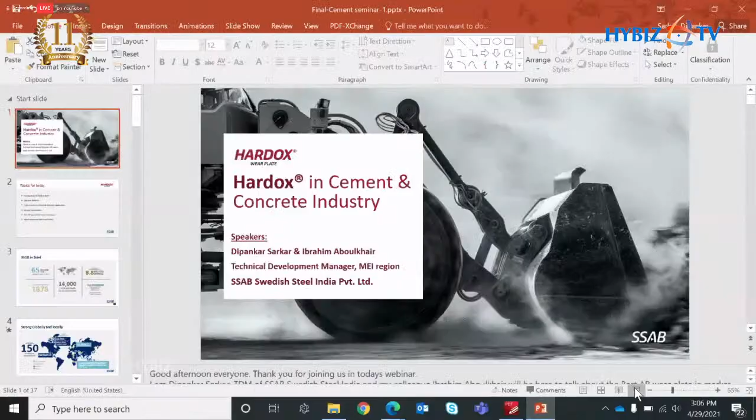Good afternoon, everyone. I hope you are seeing my screen right now. My name is Dipankar Sarkar, Technical Development Manager for SSAB Steel India Private Limited. I'm taking care of India operations, and with me is my colleague from Germany, Mr. Ibrahim Aboulkhair, who is looking after the Middle East regions. Today we'll be talking about the various applications of Hardox wear plates in the cement and concrete industries and how they benefit customers.

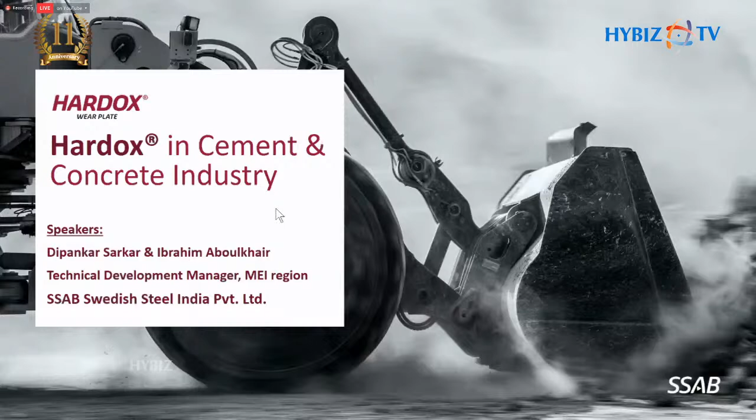So topics for today: we have introduction of our SSAB company, what is its background in brief, and upgrade benefits to the customer, how we are benefiting the environment, and also the type of wear happening in cement and concrete applications. Then Hardox introductions - we'll talk about the Hardox product portfolio and what we are capable of producing in wear plates. After that, we'll show you the overall application areas where our Hardox wear plate is currently being supplied, and how we are upgrading the wear plates in various applications. Then we'll go into direct applications, live case studies, and parts.

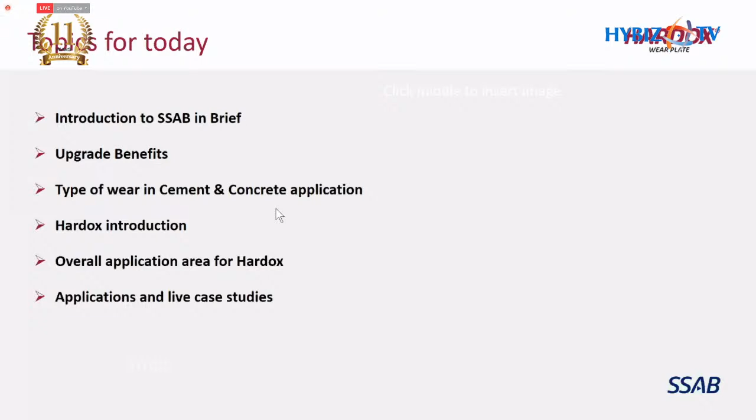Just stay tuned. So, SSAB in brief - SSAB Swedish Steel has been present in the global steel market since 1878, that is more than 140 years old. We have production capacity of 8.8 million tons annually, and currently we have 14,000 professionals supporting our customers in 50 countries. Despite having a pandemic year, we managed to score annual net sales of 65 billion Swedish krona. We have mainly three steel divisions: SSAB Special Steels, SSAB Europe, and SSAB Americas, and two subsidiaries in Finland, Tibnor and Ruukki Construction.

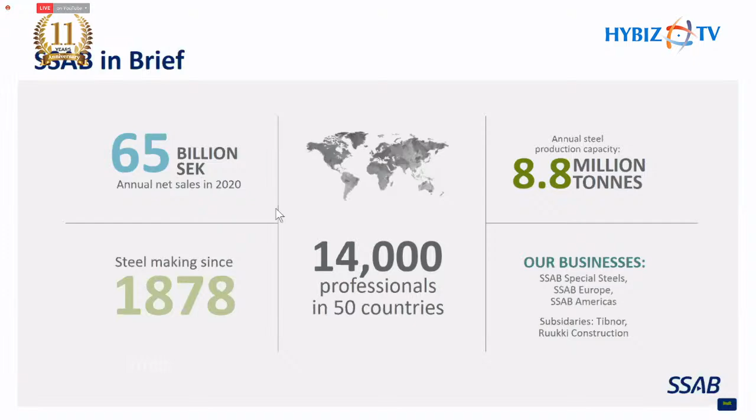So how we are present globally and locally - as you can see on the global world map, we cover more than 150 countries with our sales and tech support. We have 5 production plants in Nordic countries and 2 production plants in USA, in Iowa and Alabama. We have 3 production units in Sweden and 2 production units in Finland, along with a tube and section manufacturing unit in Finland. In India, we have 4 regional sales managers looking after commercial parts and sales support, and 2 technical development managers, including myself. There are 2 warehouses in Chennai and Mumbai, with total capacity of 7,500 tons.

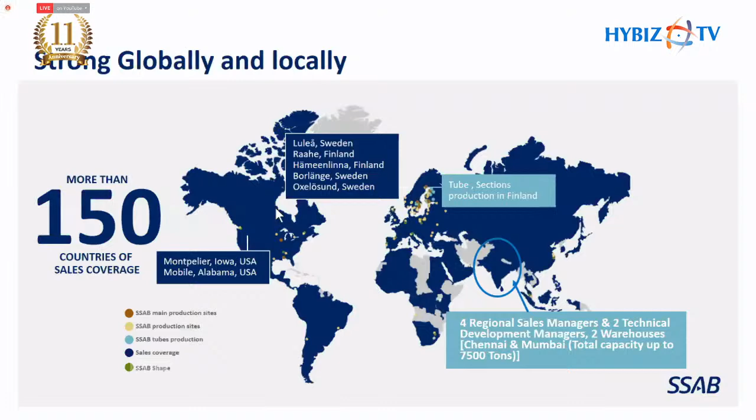So how are we upgrading? The upgradation, in order to upgrade the abrasion resistant steel - we have a vision in SSAB, that is to make a stronger, lighter, and more sustainable world. And in order to realize that vision, we are providing high hardness and high strength products to increase the service life.

Also, it will increase the strength of the product with the capacity to reduce the weight, which will result in lowering the production cost. And when you reduce the weight, it leads to less fuel consumption and less CO2 emission to the environment. So we are not only benefiting the customer, we are also benefiting the environment.

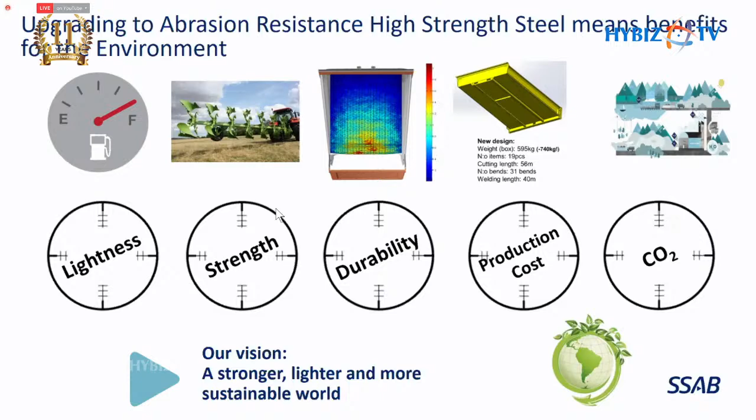So there are different types of wear which we are currently facing in challenging environments like cement and concrete industries. We mainly have three types of wear which we can see in the photographs: sliding wear, impact wear, and erosion wear, which we can also see in the cement and concrete industries.

In sliding wear, as you can see, abrasive particles slide down the wear plates and micro cut the wear plate surfaces, causing them to worn out.

In impact wear, the abrasive particles fall at a particular angle and velocity on the liner plates, as you can see, and the wear plate will be subjected to impacts because of these abrasive particles.

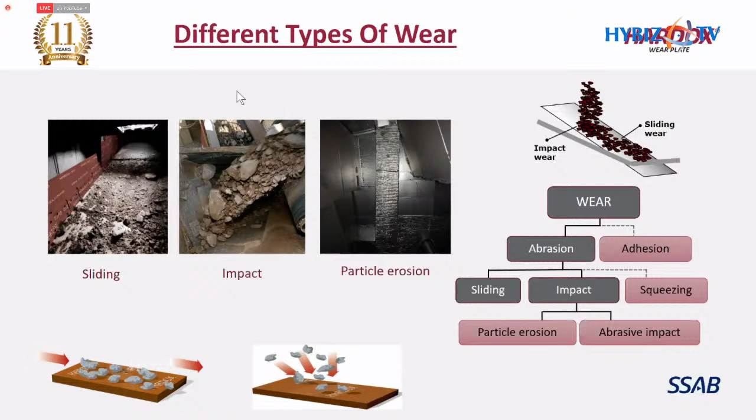In particle erosion, there is wear caused by particles of bigger and smaller fraction, falling from a particular angle and velocity, which worn out the steel plates and wear plates in the application.

So, the Hardox wear plate product portfolio. Hardox is the trademark from SSAB, and we are the only ones who can produce the Hardox wear plate - nobody else in the world can produce it.

What we offer the customer is that Hardox wear plates provide extreme durability because of the best combination of high hardness and excellent toughness. We have a range of 400 BHN to 700 BHN of hardness currently supplying to India. In thickness range, we go from 0.7 millimeter to 160 mm, and in width we can produce up to 3.35 meters.

And what we have is an upper hand in true thickness hardness properties, and the properties are very much isotropic - that is, they're the same in all directions of the plate. We also have the market's best workshop properties, in terms of cutting, welding, and bending.

We also have some guaranteed toughness options in our Hardox wear plates, and we also make tubes and bars of 400 BHN to 500 BHN material.

We are also generating awareness regarding our genuine Hardox wear plates. We have a set of cross check points which you can always come back to us and check whether the supplied wear plates are genuine or not - a questionnaire and set of cross check points to verify the genuineness of the Hardox wear plates.

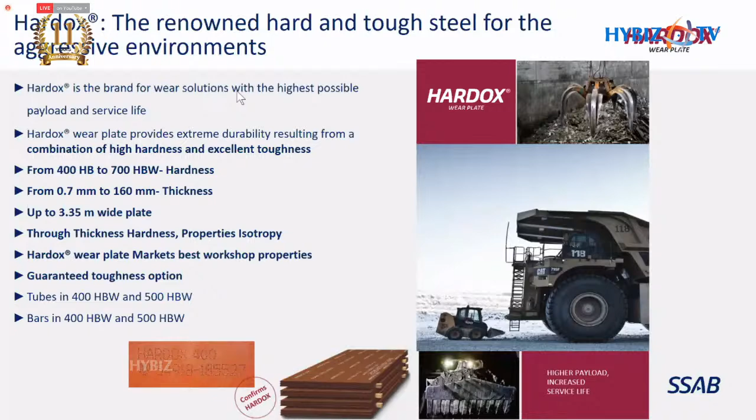There are many challenging areas that we are trying to upgrade with our Hardox wear plates - tippers and trailers, construction and yellow goods, mining and quarry, mineral processing, waste and recycling industry, metal and plastic recycling, and also agriculture and forestry industries.

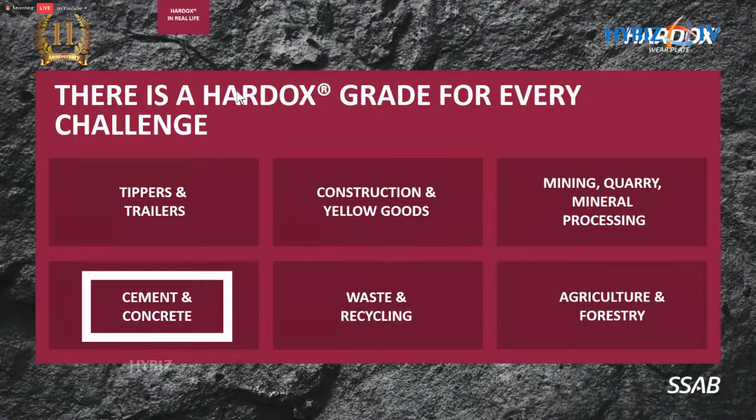We have live case studies where we've done upgradation with our Hardox wear plate, and today we'll be talking more about applications in the cement and concrete industries.

In terms of describing the competing material in this aggressive and challenging environment, we have very hard materials like ceramics, which have very high hardness but don't have impact toughness in their properties. So it won't withstand the exact criteria of your application if it's subjected to impact or erosion.

Now we come to chromium carbide overlay plates, that is hard particles overlaid in a soft matrix like mild steel. This also has its own limitations in impact toughness properties, so where applications are subjected to only impact wear, it won't sustain.

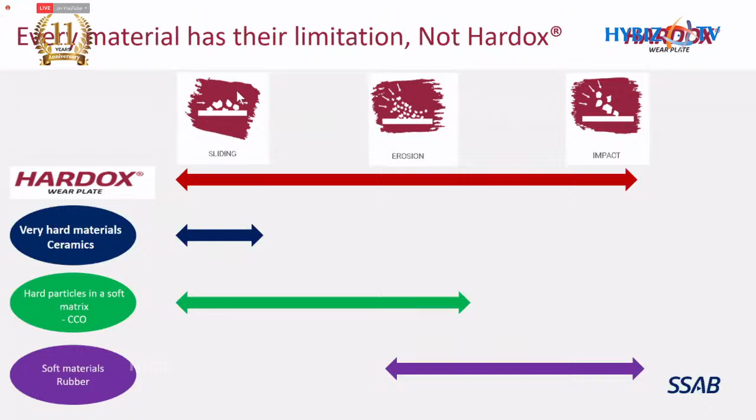So it doesn't have that adequate impact toughness property, so it will be only limited to sliding and erosion wear applications. And then we are coming into rubber. Rubber is a soft material, and it has its own impact toughness, and it can withstand very heavy blows, but it doesn't have the proper hardness to withstand sliding wear in the application. So it's also having the limitations of hardness.

So in terms of this combination of high hardness and high toughness properties, Hardox wear plates succeed to upgrade in these three applications. In terms of hardness, in terms of toughness, it has the best combination to withstand all three applications.

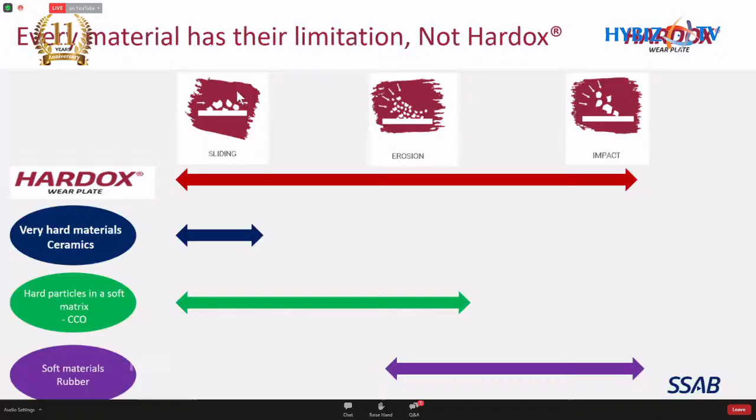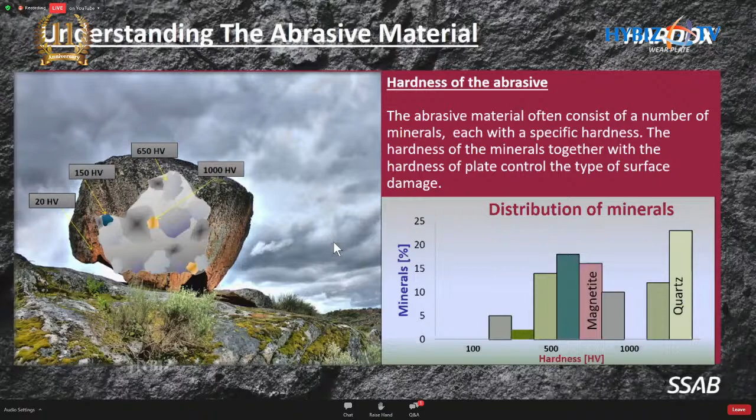So according to the level of wear, we are giving the solution of what type of suitable hardness level you should have for your applications to minimize this level of wear.

And also with the high hardness and high strength, how we can allow the customer to increase the load carrying capacity, the payload capacity, how we can do the weight reduction to make the structure light with increased wear resistance and dent resistance to give improved service life. So currently we are trying to solve these kinds of problems with our Hardox wear plates.

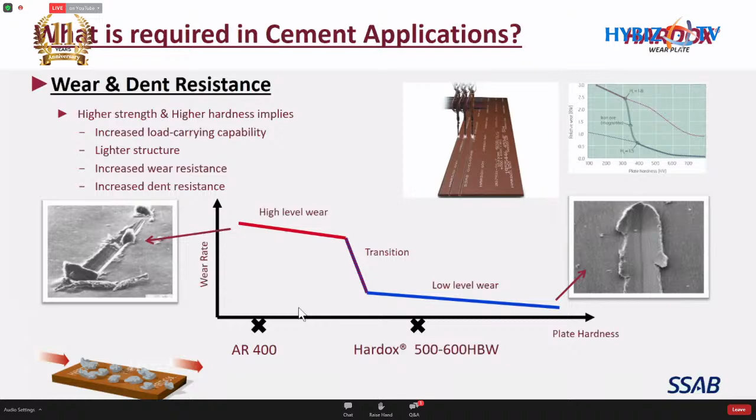So for configuration of plates, configuration of liner plates, we try to understand from the abrasive particles what type of application you are having. Then we try to understand what is the worn down criteria. The worn down criteria is at what time, at what worn out thickness, you are stopping the machine and going for maintenance.

Suppose you are using 20 mm liner plates, and the criteria to take the machine into maintenance stop is 90% of the liner plates. So how you are trying to understand the configuration of the liner plates you are having, and the application and the nature of abrasive you are using, and then we design the liner plates in such a way that the impact area, the main impact area, should have the best toughness property to withstand the abrasive particles falling from an angle and velocity.

And the side liners and end liners, which are only subjected to sliding wear, because there will be no such impact in the side liners, or very minimal impact there, but this part will be subjected to sliding wear. So it should have the proper hardness. So that's how we currently configure the liner plates for your particular application.

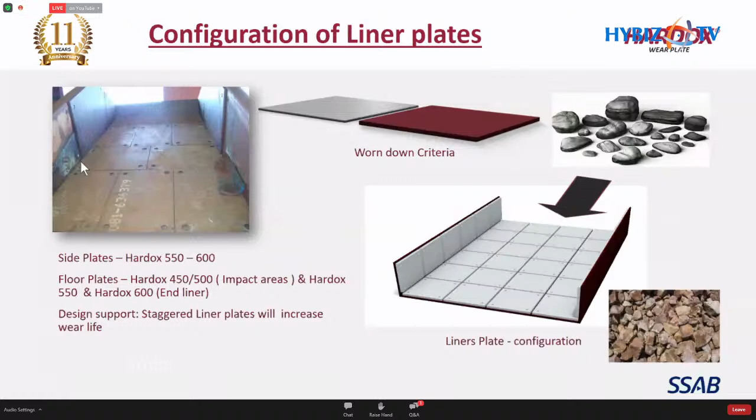So I'll be handing over to my colleague Ibrahim, and he will take you over to the various applications in the cement and concrete industry.

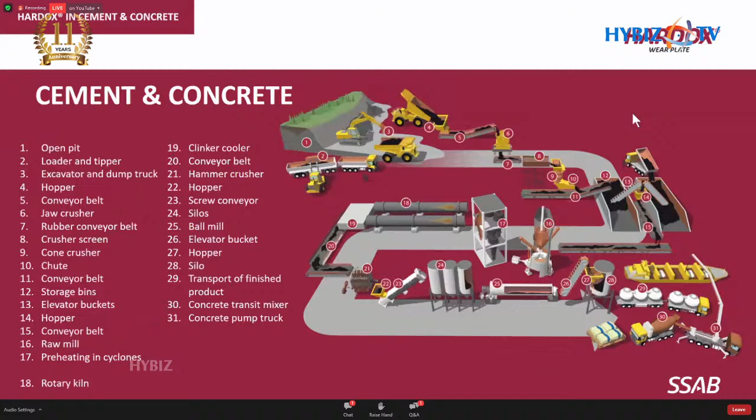Moving forward to the secondary crushing, which is the cone crusher. For that, again, you have some hoppers and feeders, and in the cone crusher itself you have an inlet cone on top, usually one part. It can be produced from Hardox as one part or as different liners, in order to make maintenance easier.

Also inside the cone crusher, there is some liners that can be done from Hardox 600. Mainly, there is one cylindrical liner that will be produced from Hardox 600. The main reason is that it's also only sliding wear, so there is no impact or problems from rocks falling from a high height.

Then we go to the chutes in number 10, and again, relined as my colleague Deepankar showed you in the last slides. It can be relined from Hardox 500, 500 Tough, and 600 as well, depending again on the size, the hardness of the rock, and so on.

Moving forward to storage bins, elevator buckets, which is point number 13. The elevator buckets is a very famous application in cement industries and quarries as well. It's usually a chain of buckets that would take material from one point to a higher point.

Those buckets can be produced from Hardox 450, and it's a very straight application, where it can stay for a very long time, a couple of years, as per our experience with our customers. For that, you don't have a headache with them. They can be relined with some Hardox 600 in some cases. We will go through that in the next slides.

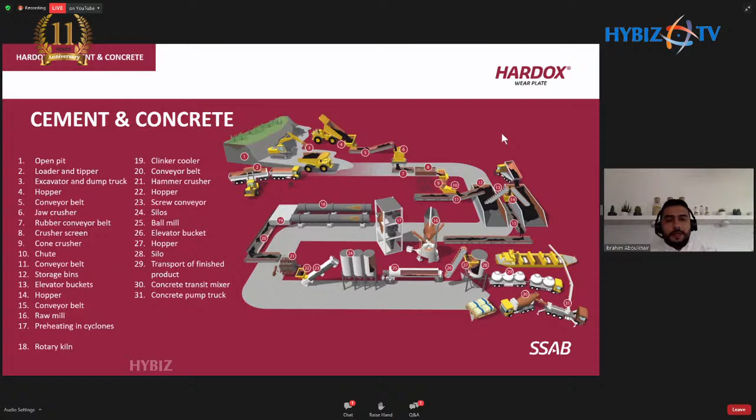So we spent a lot of time in a couple of minutes to discuss what is the cement industry and what can we support with the Hardox wear plate. Now we go a little bit deeper into each application on its own to define what can be used.

If we take the loaders and excavator buckets or shovels, we have a lot of parts here. For example, the shell part, which is the internal curved part that is roll bended, can be produced from either 450, 500, and the optimum would be 500 tuff. As I said, the 500 tuff gathers all the great features of the Hardox 450 with its structural abilities, as well as the 500 abilities against sliding wear. So 500 tuff is more or less the future of the 450 and 500 plates.

Then we go to the wear pads on the sides, where you have Hardox 500 or 600. The reason is that it's all sliding wear, and for that it's not a problem to use 500 and 600, which will extend the service life very much.

Going to the bucket side cutters, which are on the side, we also recommend 450, 500, and 500 tuff. I would personally recommend the 500 tuff, because the side cutters not only face impact from breaking the rocks, and wear from carrying the rocks, but there is one hidden use: the side cutters work as a structural component because they hold the shell together with the cutting edge. So they have also a structural use, and for that the 500 tuff would be an optimum solution.

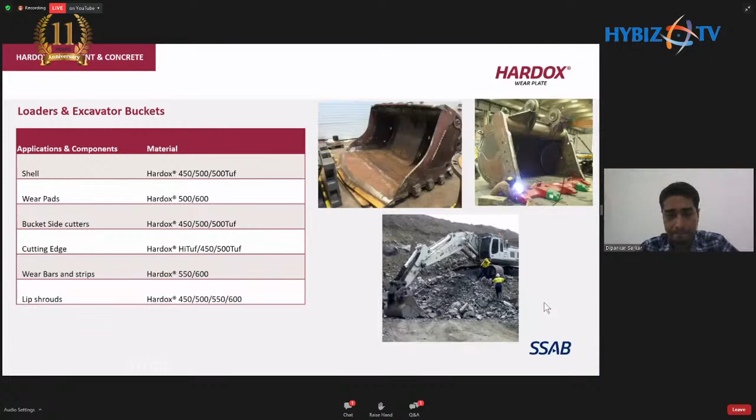Next slide. One example case, since we speak now about the new Hardox 500 tuff, the next generation of the 450, in excavator buckets: we have one standard bucket on the left where a customer came to us, producing it from mild steel with 450 Brinell wear plate. It has a weight of 21 tons, capacity around 15 cubic meters, and load capacity of 39 tons. They came to us wanting to upgrade to improve performance and productivity.

So we went with Hardox 500 tuff, which has higher hardness and dent resistance than the Hardox 450 and mild steel. This allowed us to decrease the thickness of some parts, reducing the weight by 22%, from 21 tons to 16.4 tons. Also, decreasing thicknesses and improving the design supported increasing the capacity from 15 cubic meters to 18 cubic meters. The load capacity increased from 39 tons to 43.6 tons, meaning an 18% gain in higher load capacity and better productivity. It was produced from Hardox 500 and 500 tuff.

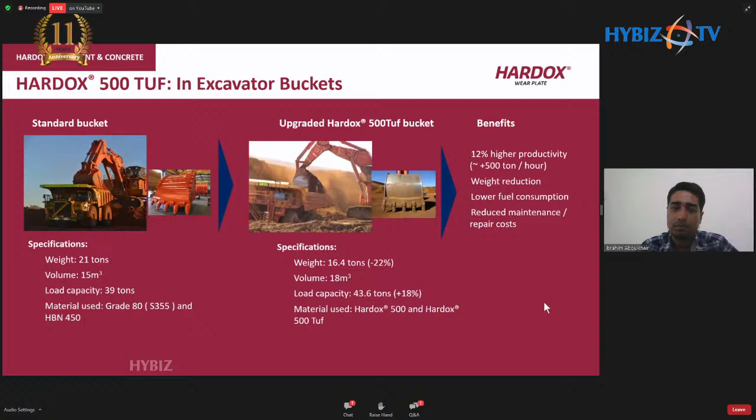So the benefits: 12% higher productivity, weight reduction, lower fuel consumption. As Deepankar said, we are moving toward low carbon dioxide emissions and saving the environment worldwide. Also, reduced maintenance and repair is very important, since it avoids stoppage in work and the costs of maintenance. Next slide.

In the next slide, now we speak about the dump trucks. We finished the loaders and excavator buckets. We moved to the dump trucks, in which we have also, like I said, the mother plate or the structure itself, and then you usually only change the liner package that you have. As you see in the picture, it's more or less some parts that will be cut, and then you have to assemble over it as liner plates.

Hardox 500 tough, optimum solution. The reason for that: the tipper bodies carry big rocks, but not as big as the dump trucks carry. Since the rocks are bigger and harder, you need higher dent resistance. So 500 tough has proven better resistance to dents, and you gain 50 Brinell difference from 450 to 500 in hardness. So Hardox 500 tough can be used for the complete floor, the sides and the front, no problem, compared to Hardox 450, since the impact and sliding wear is somehow less.

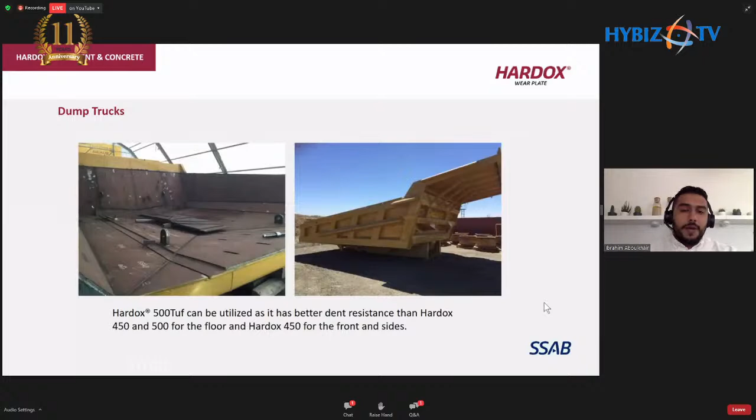One case from a customer we have: they also had their own liner kit. They were using 400 Brinell wear plate, and the weight of the whole liners was between 5 to 15 tons. They had a service life of less than 8,000 hours. Again, they came to SSAB asking how can we improve our performance and productivity. Hardox 500 tough is the answer, with some additions of 500 and 550 depending on the use. We increased the productivity by around 4,000 hours, so from 8,000 hours to 12,000 hours service life, as well as using thinner material when upgrading to higher grades, which allowed us to decrease the weight of the liners and the whole truck.

If you check the text at the bottom, if with each truck you reduce consumption from 300 liters per hour to 298 liters per hour, more or less for your whole production, you will save 12,000 liters per year. That's a lot of money, a lot of carbon dioxide emissions, and so on.

Benefits: higher productivity, lower fuel consumption. Maintenance stops are a headache in each quarry, cement plant, or whatever site you have. If you have maintenance stops, you are losing money, no production, and that's what we can support you with. Next slide, please.

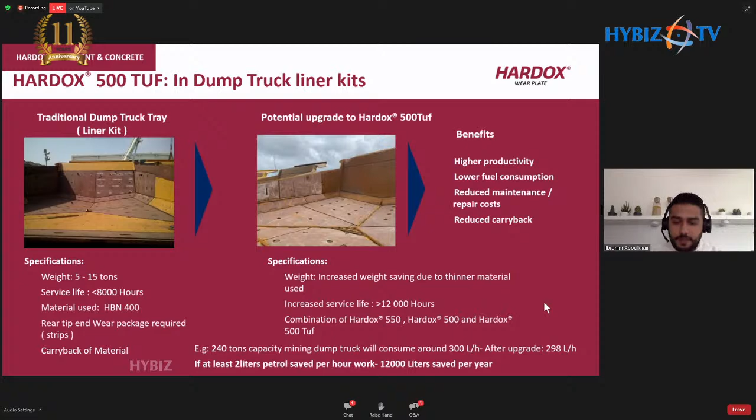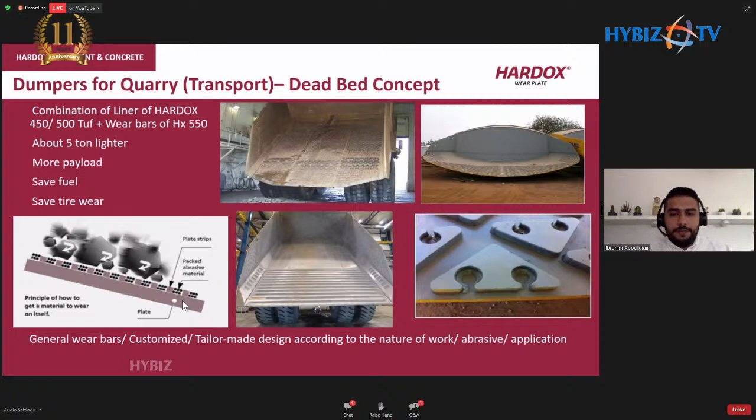So we finished the excavator and loader buckets, and the dump trucks. Now we go to the tippers.

I really like this segment because there are a lot of improvements that can be done when upgrading from mild steel tippers to Hardox tippers. The idea is that in the sides we avoid using stiffeners, and instead use bends to increase the stiffness, so you don't lose the stiffness of the tipper. The shape allows carrying bigger rocks, and you have a lot of wear savings.

In the floor, decreasing the thickness from mild steel to Hardox alone gives around 20% weight savings. So the floor thickness reduction helps a lot with weight reduction.

The service life will increase, more or less, from mild steel to Hardox 450 or 500 tough by 30 to 50%, and that's between 450 and 500 tough. So if you go from mild steel to 500 tough, you get at least 2 or 3 times the service life of the tipper.

Then we have the top rails, which are more or less the structure holding the whole tipper together. The design of these top rails has to be done smartly in order to avoid stability problems like buckling. So the design has to be done in a very nice way, and still you decrease some weight in that.

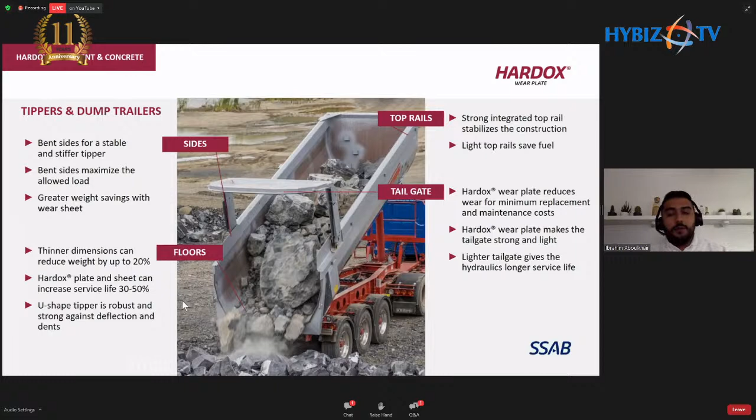Finally, the tailgate, which is more or less the part with the most damage, due to the driver locking rocks onto the gate while driving, as well as when tipping, where the hydraulics get a lot of damage. So having Hardox in the gate will extend the service life, as well as protect your hydraulics, which is very expensive for each tipper, and without it you can

have impact problems in that case. Then we have the screw conveyors, which usually move granular parts and handle bulk material.

They are typically mounted right on top of the hopper, or sometimes on a silo for storage. For that, we recommend using Hardox 500 tough or 500 in the screw blades, shown in the second picture from the right. So for the screw blades, we recommend 500 or 500 tough.

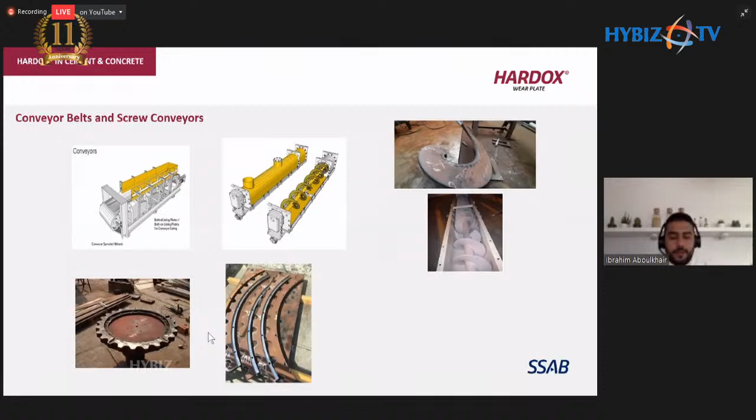Next slide, please. Then we go to the screens. Sorting screens can be used to pre-sort, classify, or size-split, as we discussed at the start of the presentation. Only the parts that have reached the required size can pass through.

Hardox has proven great performance here, depending on the thickness, whether there's a complex shape, whether roll bending is needed, and so on. One good example is in the top picture to the right: Hardox 600 at 12 millimeters, cut by laser cutting, which performed quite great.

If you don't have a laser cutting machine, or there's no facility around you that can do that, high-definition underwater plasma cutting can perform similarly, and we can support you locally to define the cutting sequence to follow, in order to avoid softening the small steel parts between the holes, which is the main issue with screens.

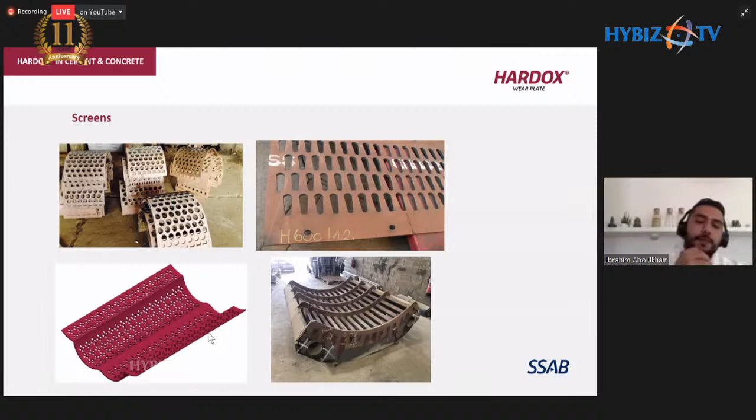Then we have the grizzly bars on the bottom right. The structural parts holding the grizzlies together can be made from Hardox 450 or Hardox 500 tough. The grizzly bars themselves can be made from Hardox 500.

Next slide, please. Then we have the elevator buckets. There are mainly three points I'd like to discuss here. The first one is quite easy.

The bucket itself, in Hardox 450 straight, has quite a long service life, more than 4 years, so you don't have a headache with that.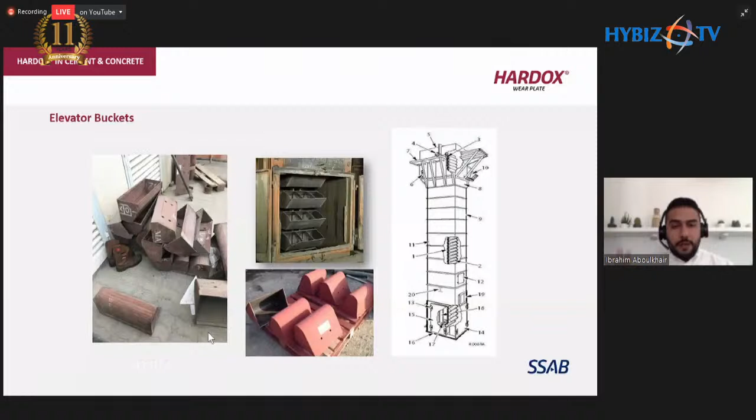The second point: when elevator buckets are damaged, the main problem is the cutting edge. If you have a problem there, you can use Hardox 600 as a strip on the front to improve wear performance. So, Hardox 450 for the bucket, Hardox 600 for the cutting edge.

Finally, the third point is the casing of the elevator bucket itself. It can also be produced from Hardox 450, extending the service life as well.

I think in India, SSAB has had some success cases in that as well.

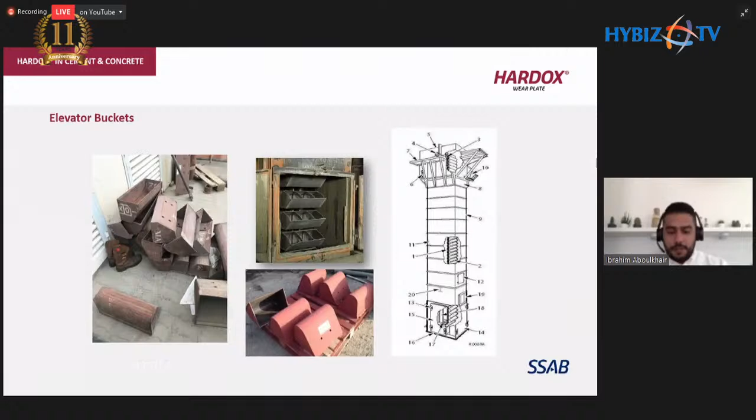Next slide, please. The most important part in a cement plant is the vertical roller mill. It grinds the raw material, or the raw mix, during the manufacturing of cement, and it is fed later to the cement kiln, which transforms it into clinker, which will later become cement. So the raw mill undergoes severe wear on the grinding table and walls, as you can see in the gray liners at the bottom.

And mainly in that we have some success cases using Hardox 600. The main reason is that usually chromium carbide overlay plates are used, but using Hardox 600 will more or less reach a service life quite close to CCO, a little bit less, but for that you are saving around 30 to 40 percent in costs. So for 2 sets of Hardox 600, you may buy 1 set of chromium carbide overlay plates. So you are paying more money for less time.

One more application is, of course, the separator, the 2 pictures at the bottom left, which is Hardox 450 and 500 Tough at the moment. For that, they are just guide vanes to direct the flow of air or particles, and it's quite an easy job to be done. It's just some welding and some cutting.

We also have the reject cone, which can be produced from Hardox 600, depending on the roll bending radiuses. And then again, the grinding table can be done from Hardox 600. I don't want to miss anything in this slide because it's quite important. Yeah, we can move to the next slide.

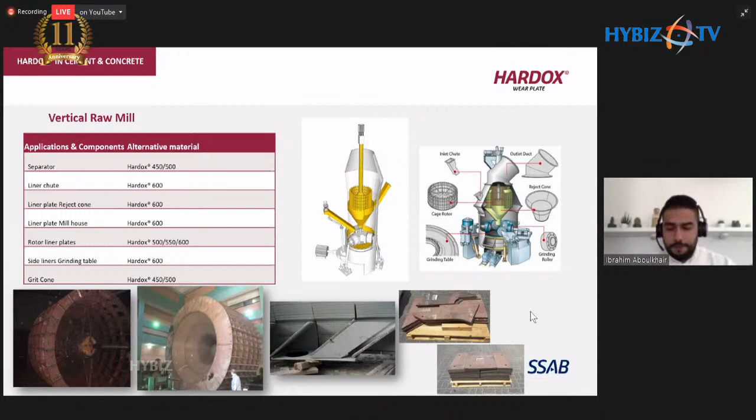Then after that, we have the centrifugal fans, which is usually a very important part, because usually all the fins can be produced from Hardox 500 due to the much better sliding wear resistance. Usually it's fighting a lot of contamination from quartz, which is a problem when it comes to sliding wear. So Hardox 500 can be used in a nice way in this part.

Also for the cone on the top and the bottom plate, they can be done from Hardox 500 as well. It's not a problem at all with roll bending. We can support you with the processing, as well as the casing, which can also be done from Hardox 500 to improve the service life when it comes to sliding wear.

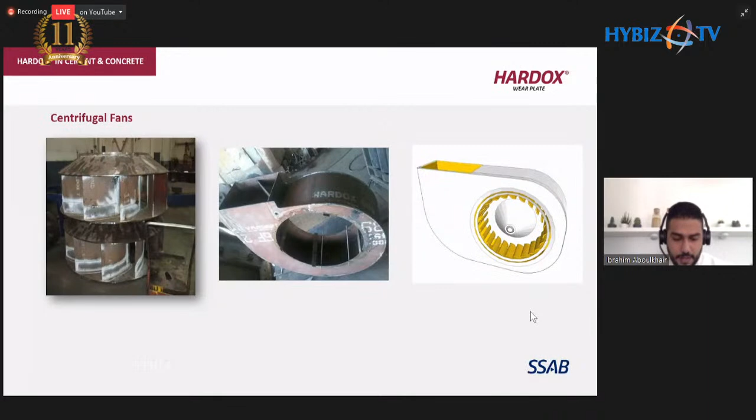Next slide, please. We move afterwards to the cyclones. The cyclones preheat the output of the vertical roller mill to be transported to the rotary kiln. At some parts, we have cyclones that are still not at a very high temperature, so it can be produced from Hardox 450 and 500 Tough, as shown in the pictures below. Later in the cyclones, it becomes around 900 degrees, which is quite hot for Hardox.

And in that, there are some other solutions. Wear liners in the cyclone walls made from Hardox are extremely strong, and not only strong, they can also reduce the weight, which helps a lot during maintenance stops when changing the liners. Next slide, please.

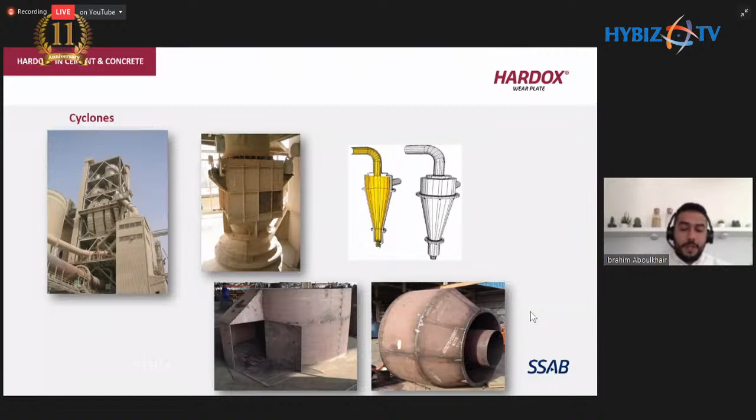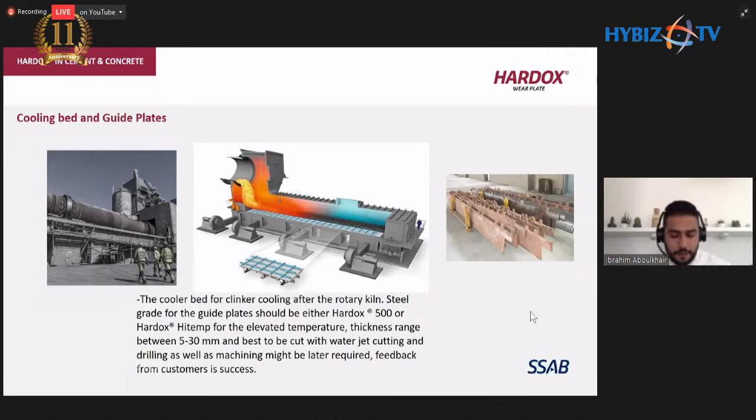Then we move to the rotary kiln. In the rotary kiln especially, we don't have a lot of applications, since the temperature is between 1000 and 1500 degrees. The only thing we can speak about is that after the heating, there are some cooling beds with guide vanes that divide the flow. The temperature at that point is around up to 500 degrees, and for that we have Hardox HiTemp. It's usually between 5 to 30 millimeters, water jet cut, and we have a lot of success cases for that especially. Next slide, please.

In the hammer crushers, this is a very important part. Again, in some liners, if the temperature is still very high, we can use Hardox HiTemp. In other cases, the hammer itself can be produced from Hardox 500, 550, or 600. The main thing is that sometimes the hammers are quite thick, up to 120 millimeters, and sometimes Hardox availability in the local market cannot be there.

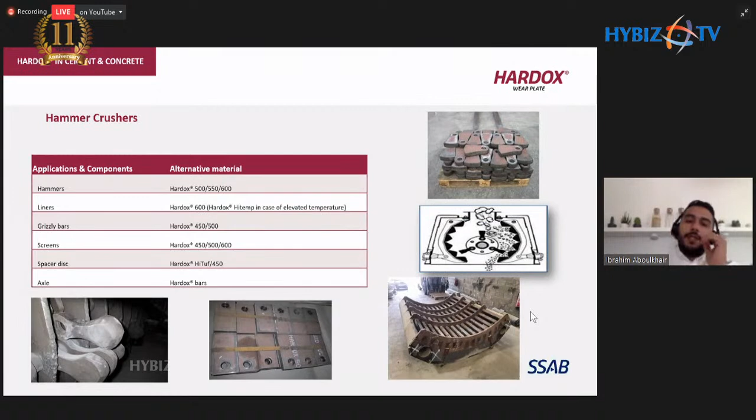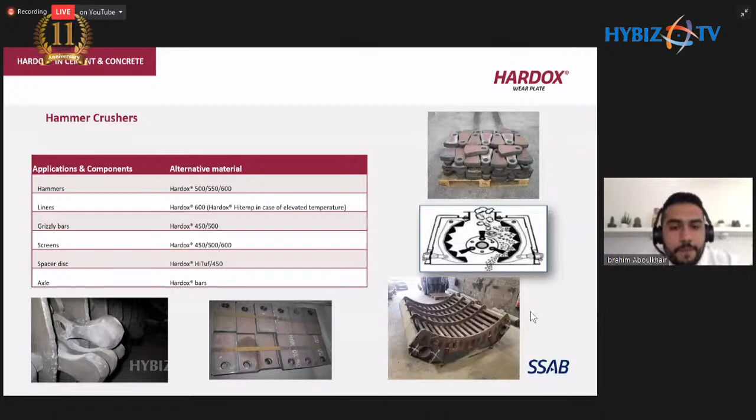Below that, we have the grizzly bars that we discussed in the screens, and we already discussed the HiTemp in the liners. Next slide, please.

In the final parts of a cement industry, we have the silos, which are used more or less for homogenizing, and they more or less define the size of a cement plant. In some cases, they are also relined, especially the internal cones, using Hardox 450, 500, or 500 Tuf. Then finally, we have the last grinding step, which is the ball mill.

The ball mill is relined with more or less castings, but the castings cause a lot of problems. The weight is very high, which requires a lot of power, which is a lot of money, and the noise is very high and not allowed in many places. The solution is that we use Hardox 500 or 600 embedded into rubber to decrease the weight and improve the impact toughness, using the rubber's ability for that, and it performs much better than the castings.

One more application, as you can see in the middle part, there are two green diaphragms. One is the intermediate and one is the discharge. So we have two sections: one is for grinding to a certain size, and the second one is for grinding to a second size.

Those diaphragms have proven a lot of success in many cases, especially from Hardox 600, since there is more or less no impact on them. They are on a different direction than where the impact is happening. They only pass the grinded material to the next section, so it's only sliding, and Hardox 600 has proven a lot of success in that. You have at least 15% more service life than castings in the diaphragm, and that's quite huge for the ball mills.

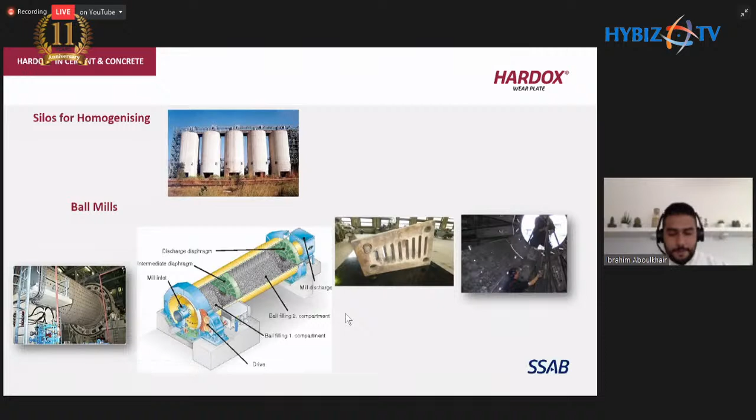Then we have concrete. We go to the concrete. Usually we have concrete mixers, concrete pump trucks, and stationary concrete mixers. We can move to the next slide directly, we're running out of time.

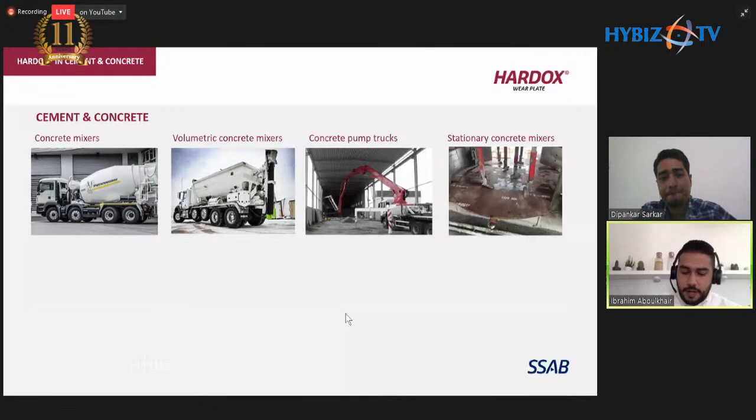In this case, I've chosen one example. If you look at the left side picture, you see the drum itself in red, which is produced from Hardox, and the chassis in blue, produced from Strenx material, Strenx 700. Then inside we have the drum shell and the fins in the middle. Most of the wear is usually on the fins. The drum is having wear, of course, but the fins are the highest affected part.

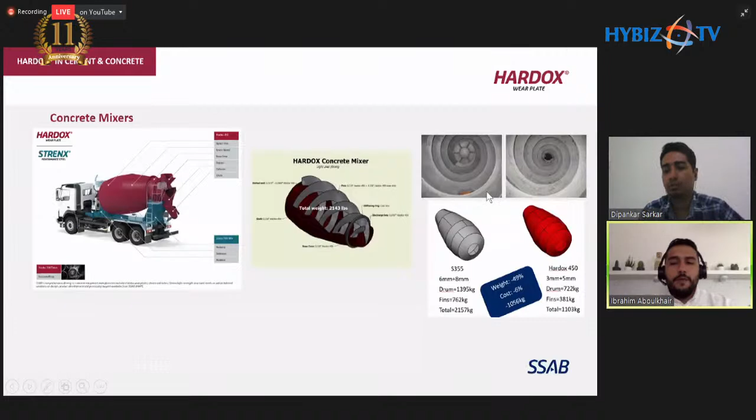We have one example on the bottom right part: one drum from mild steel and one drum from Hardox 450. The fins are from mild steel on the left side drum, which is 6 millimeter, with fins at 8 millimeter. On the right side, using Hardox 450, we reduced the drum to 3 millimeter and the fins to 5 millimeter. By that, we reduced the weight by 1 ton, which means much less fuel consumption, and the cost of production decreased by 6%.

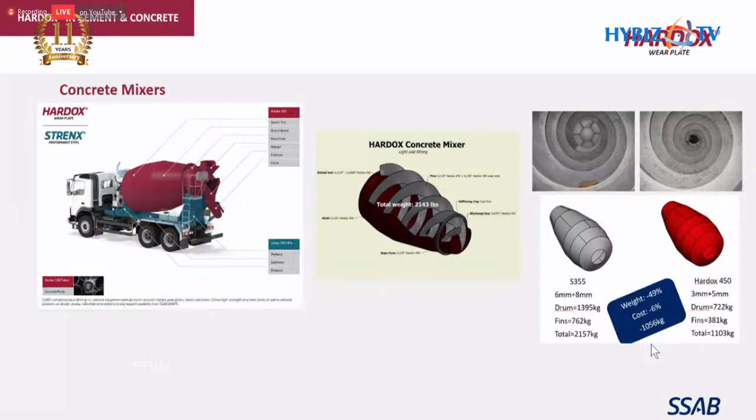So you upgrade to Hardox, and you think Hardox is more expensive than mild steel. But at the end of the day, your complete manufacturing cost—material price, welding, cutting, bending—has decreased by 6%. So that's one of the benefits you get when upgrading.

For the stationary concrete mixers, the liners for different types of mixers, such as planetary, vertical, and mobile mixers, can be relined by Hardox 600 right away. In some cases, if there's a complex shape, it can be Hardox 500, but usually if there's only a little bit of roll bending or if it's flat, Hardox 600 all the way. On the right side, you can see Hardox 600 in paddles, more or less 25 millimeter thick, competing with hard materials.

Hard materials are very, very expensive—more or less the most expensive material when it comes to wear resistance worldwide. Comparing the service life of Hardox 600 with hard materials, we have a 50% increase in service life in the paddles, and more or less an 80% decrease in cost. So Hardox 600 in that application is also great and performing quite well.

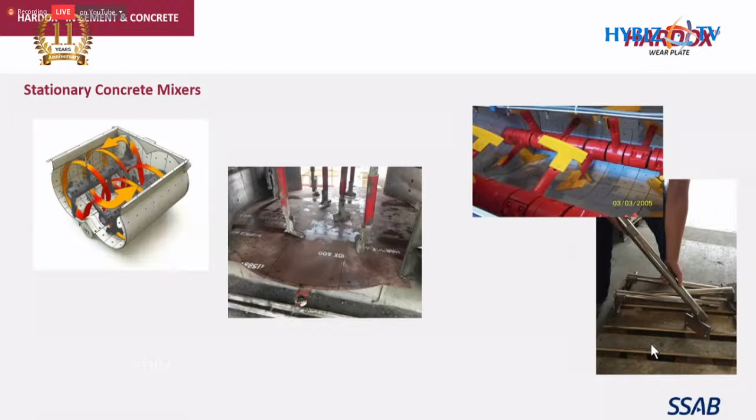Finally, we have concrete molds in concrete. We have different types of concrete moldings, such as paver molds and building bricks, among several other types.

Hardox wear plate can increase service life compared to mild steel by at least 3 times. We usually discuss this a lot with the TDM, Mr. Dipankar. In some cases, we have molding equipment where they pour the concrete, and after it solidifies, there is vibration before they remove the equipment. Having Hardox here is a little tricky because of the vibration and toughness requirements.

For that, we have 2 types. The first is when you have high frequency vibration but for a very short time, like 5 seconds. In that case, Hardox 600 works quite well, quite fine. The fatigue life will not be reached, so you won't have cracks or similar problems.

In other cases, we have longer vibration times but very low frequency, which can get up to 2 minutes of vibration. For that, we recommend Hardox 450 or 500 Tuf, since the impact toughness will also not be reached. With Hardox 600, you can reach up to 1 million concrete blocks, and for 450 and 500 Tuf it's more or less the same.

Next slide, please. Keep in mind the conclusion: understand the material processed and what kind of wear it imposes on different applications. You have to study the rock you're working with, its hardness, its shape, sharpness, and so on. Also be aware of areas where the temperature exceeds 250 degrees.

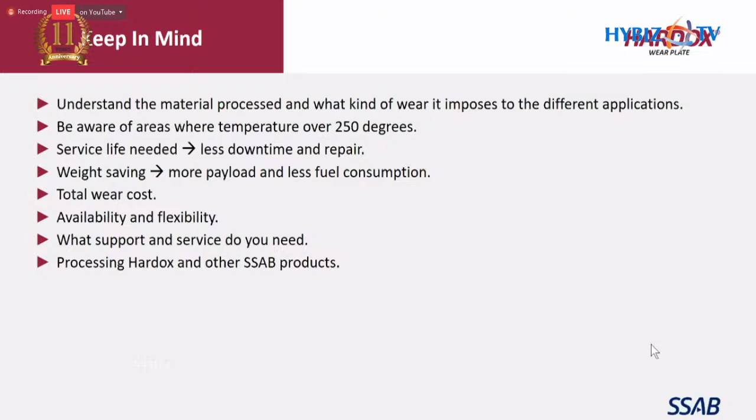Next slide. My final topic is a discussion about some SSAB mobile applications. You can download all these applications on your mobile phone, either from Google Play or the App Store on iPhone.

We have Hardox WearCalc, which gives you comparisons and relations to what happens when you upgrade from mild steel to Hardox, or from Hardox 450 to 600. It's a nice application, and we can support you with that.

Then we have Weld Calc, which helps you get the parameters for welding SSAB products, Strenx, and Hardox. You can download it and check, for example, if I'm welding Hardox 600 5mm with Hardox 450 10mm, what consumables and parameters can I use. The application will output that.

Then we have SSAB Bend Calc, similar to Weld Calc, which helps you get the bending parameters. You can say I'm bending Hardox 450, thickness 10mm, length 1 meter, and it will output the bending parameters, the punch radius, die width, tons required, and so on.

Finally, we have Smart Steel, an application that helps you track your plates to avoid fake Hardox. You give the plate number and it gives you the MTC, the Material Test Certificate, helping you track and trace your plates and get commercial offers, among many other features. All these applications are free and downloadable from Google Play or the App Store.

We have a lot of Q&A. Regarding any commercial matter, you can always come back to me. I'll share this commercial questionnaire, like cost differences and so on, with our regional sales manager.

For Hardox, fixing holes can be drilled easily. Yes, with the correct parameters, Hardox wear plates can be drilled easily. We have the machining recommendation guidebook for your perusal.

If I can add one more point, Dipankar, I'm sorry. For drilling Hardox, it's quite easy, but there are some recommendations. Very important: do not preheat before drilling. When it comes to lower grades, up to 500, you can use a radial drilling machine with very good fixations, no wood fixations, and proper cooling liquid.

Above 500 Brinell Hardox, it's better to use either a milling machine or a CNC drilling machine. Do not use a radial drilling machine. Again, fixations cannot be done with wood, and you have to use the proper cooling liquid.

Thank you for the insight. We have various questions regarding the manufacturing and fabrication processes for SSAB plate, like cutting, bending, welding, drilling. As we are discussing that, we have all kinds of recommendations with us. Let me discuss with you - you can come back to me, and we can discuss what type of thickness and what type of Hardox wear plates you are using. According to that, we can suggest you.